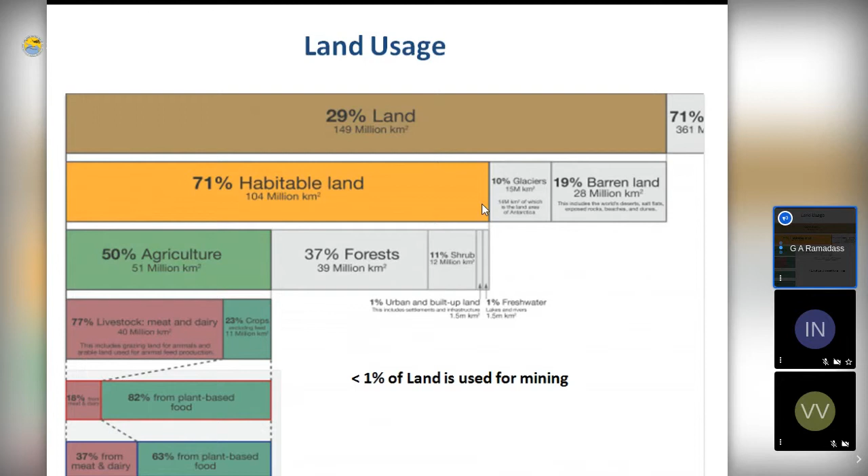Hardly 1% of the land is used for mining, and we have been using the minerals from this land. We have been using, misusing, and abusing these minerals for the last 5,000 years. Imagine if 1% can see us through for 5,000 years, then what can 70% give us? That is the importance of the deep ocean mining concept.

As you can see, many of the minerals will not last even for some decades, and some may last for some centuries. The great demand from developing countries for their just share and genuine needs is actually increasing the demand for these minerals.

Of course, we can alleviate these things by more exploration, better technology, and reclassification of resources to reserves. But there is a limit to what we can do about it. So ocean mining is imminent. It's not the question of if, but when and how.

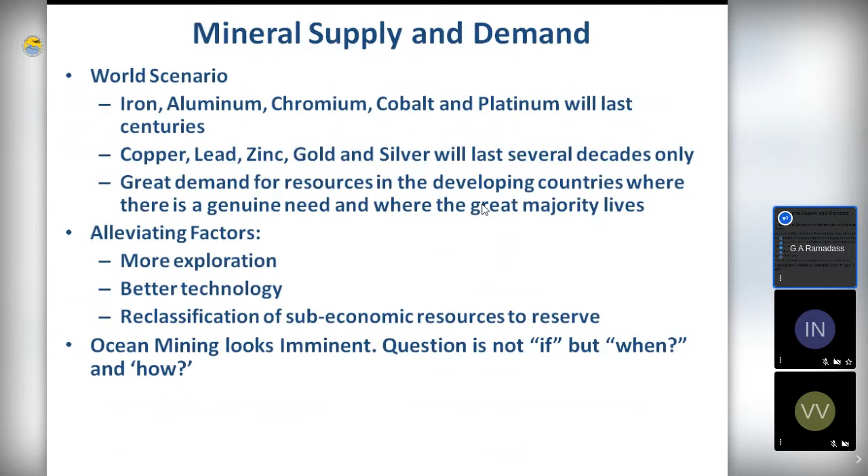So this is the history. In 1870 itself, there was speculation by Jules Verne, a famous science fiction writer, about the availability of these minerals at the sea bottom. But he said it is easier to exploit it. It's easier said than done, and we find it very difficult now.

As you can see in the right-hand corner, that's a painting of HMS Challenger. During 1872 to 76, they sampled some polymetallic nodules, which are like potatoes strewn on the seafloor, and they found that they are rich in iron, cobalt, nickel, and manganese. So we can say that is the beginning of the ocean mining efforts.

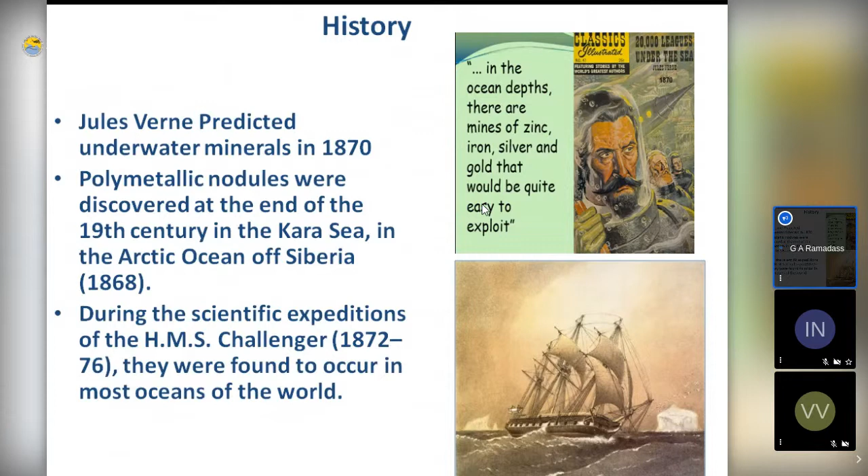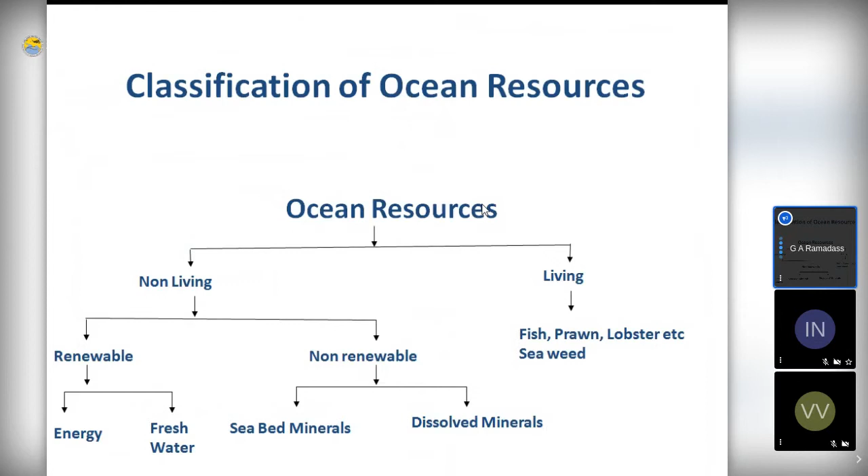There is no unique way of classification of these ocean resources, but I can say that they can be living or non-living resources. In the non-living category, today we are going to concentrate only on the seabed minerals, because there are some dissolved minerals like salts, uranium, and other metals.

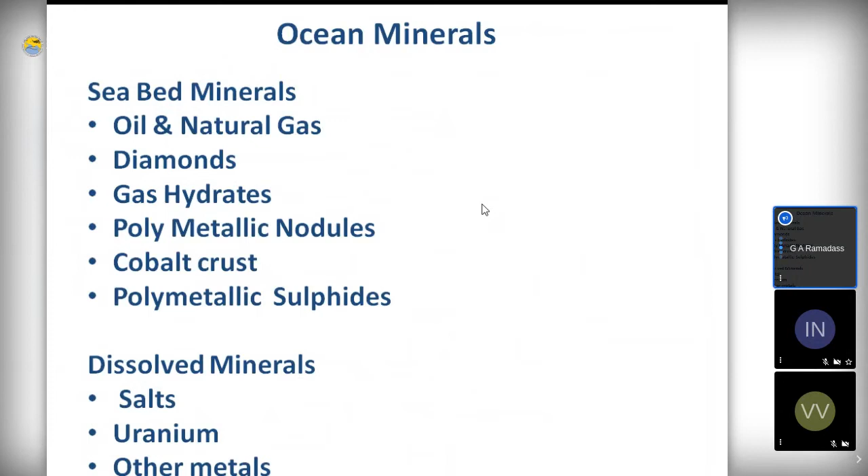Our concentration is on the seabed minerals like oil and natural gas, but I'm not going to talk much on them, and diamonds also I'm not going to talk. But gas hydrates, polymetallic nodules, cobalt crust, and polymetallic sulfides, these are of interest to the Ministry of Earth Sciences. So we will be concentrating on these four resources.

India has an exclusive economic zone which extends up to 200 nautical miles. The extended exclusive economic zone also extends even further. Whatever is available here is actually our resource, and we can use it without any express permission from any other organization. But beyond that, what is available is called high seas, and it is regulated by the United Nations, especially by the International Seabed Authority.

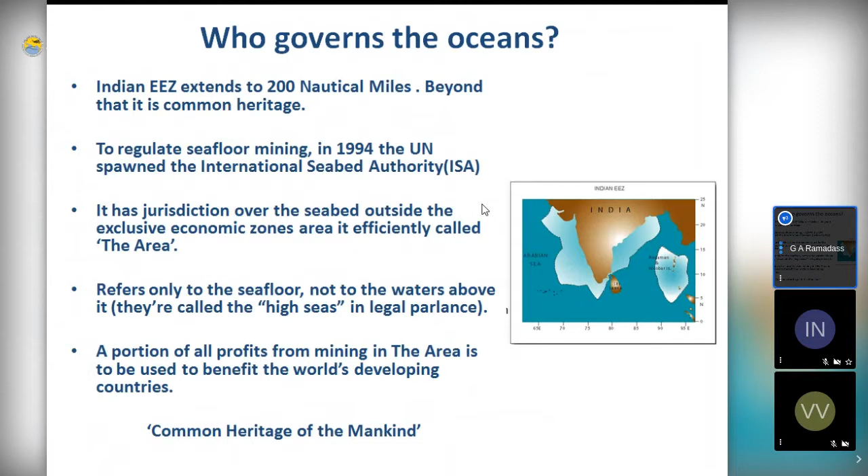It is an independent body, and they allot an area for the exploration and exploitation of minerals, and that area is called the Area. Beyond this, the rights are only given for the seafloor, but the waters above are called high seas, and we have no rights about that. A portion of the profits from this mining, whenever it comes, should be considered common heritage to mankind, and should be used for all mankind.

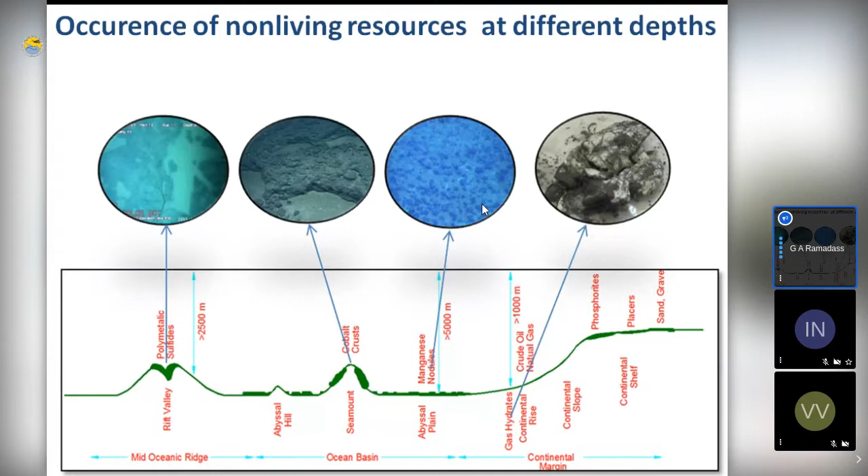So where do these minerals occur? Starting from the continental slope and continental rise, the first mineral that generally occurs is the gas hydrates. As the name suggests, it is a hydrate which contains gas. It is like camphor, it can be lighted and you can hold it also. A cage of water molecules hosts a gas molecule like methane or some other gas, mainly methane in our case. A cubic meter of gas hydrate can comprise 164 cubic meters of gas. It's like a small gas cylinder.

So the Ministry of Earth Sciences has an exclusive program on these gas hydrates, especially in the Krishna Godavari basin. We have concentrated our efforts there.

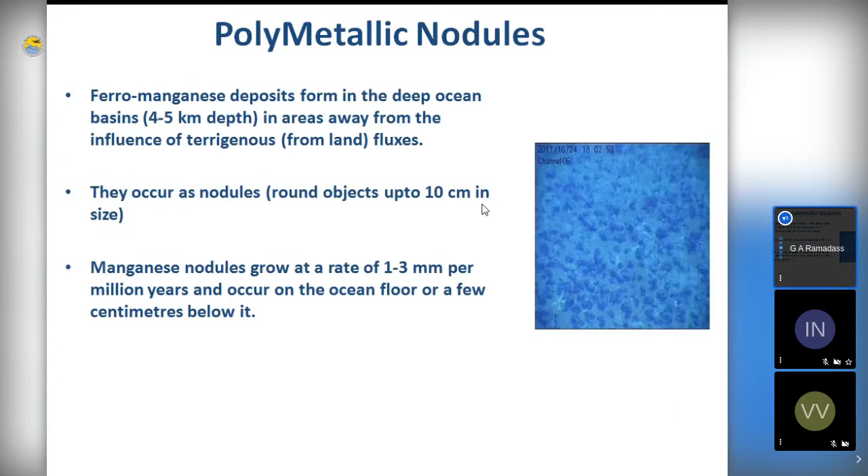The next one is polymetallic nodules. These are ferromanganese deposits. They actually look like potatoes, maximum size 10 centimeters. They are called two-dimensional minerals in the sense that they are available on the seafloor, and all we have to do is pick them up from that depth. But it's at 4,500 to 5,500 meters water depth, and these nodules grow very slowly, maybe 1 to 3 millimeters per million years, and that too when there is a nucleus like a shark tooth or some hard rock, layer by layer these things grow.

About India, India became a pioneer investor in 1987, even before the starting of this International Seabed Authority, along with a few more nations. An area of 1,50,000 square kilometers was given to India in the Indian Ocean, at almost 15 degrees south, 13 to 15 degrees south of India, from 2,400 kilometers away from the Indian coast.

A 15-year contract was signed with ISA in 2002, and it was extended up to 2022 in 2017. As you can see, the area is around 2,400 kilometers away from the Indian coast towards the south, and it has so many million metric tons of nodules which contain manganese, cobalt, nickel, and copper in the quantities mentioned on the right hand side. You can see the percentage - manganese is 27 to 30%, copper is 1 to 2%, and so on.

But it takes around 9 days for the ship to reach this place. As the old joke goes, by the time the ship reaches there and starts working, 50% of the team is seasick and the rest of the team is homesick.

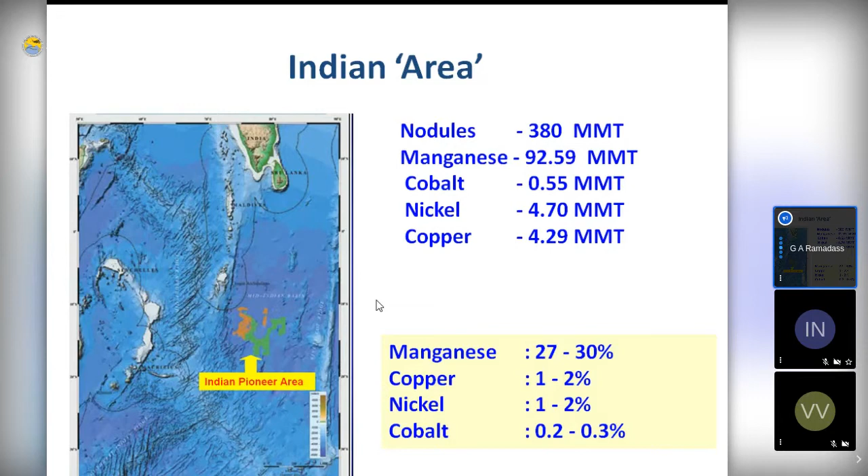So the next one is polymetallic sulfides. When the continental plates meet, when there are some gaps, the cold water tries to seep in and it meets the hot magma which is trying to come up. When they meet, a geyser-like system forms, and the steam that is generated gushes out. While coming out, it brings a lot of metals in the form of sulfides and sulfates, especially iron, copper, and zinc.

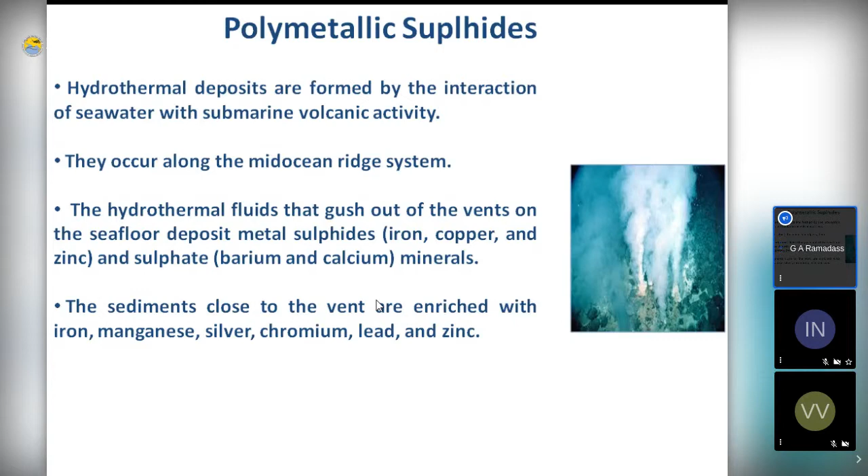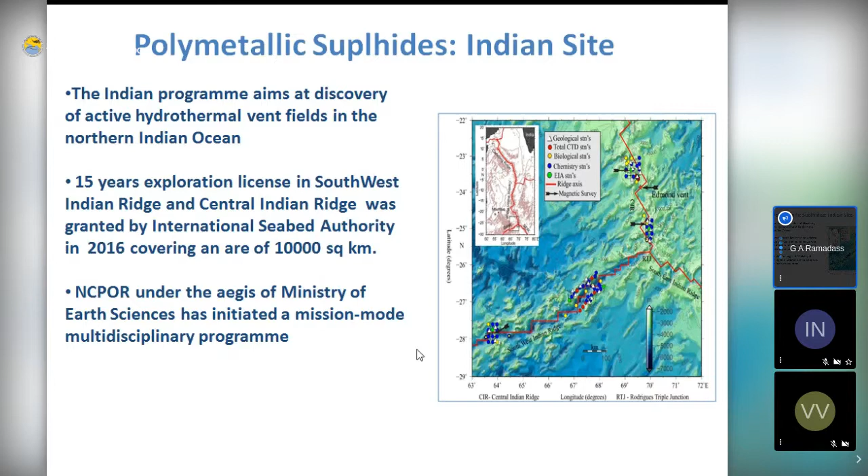Sediments close to the vent enrich the surrounding rocks - this is called mineralization, and these minerals can be harvested using the right technologies. India has signed an agreement with the International Seabed Authority for a 15-year exploration license in 2016, at around 25 to 26 degrees south, as shown in the picture. The National Center for Polar and Ocean Research, under the aegis of MoES, has started a mission mode multidisciplinary program and done a lot of survey and sampling work at this place.

Another important mineral is the cobalt crust. It's similar to nodules, but occurs as layers stuck to the ocean bed, so we have to scrape it off rather than collect it directly - it's not exactly a 2D mineral, so it needs hard scraping. It generally occurs on seamounts, and there are around 33,000 seamounts worldwide. In the map, the marked areas are the seamounts. India has not yet signed any contract with the ISA for exploration of cobalt crust.

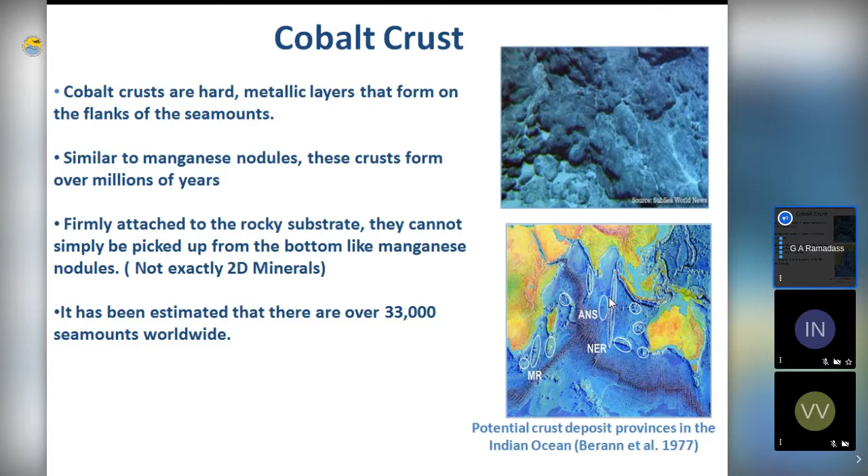So what are the challenges? Minerals are available, but it's not as easy as terrestrial mining, because the ocean - inner space, as we call it - is more difficult to conquer since it's a dynamic medium. The hydrostatic pressure at 6,000 meters is around 600 bar, so if you send a big vehicle there, it becomes a sort of pulp at that pressure. We need to develop appropriate pressure-resistant, pressure-compensated, and pressure-tolerant technologies for that.

Density and salinity variations also pose problems. Temperature is around 35 degrees on the surface and around 2 degrees centigrade at the bottom. Corrosion, especially galvanic corrosion of different metals, is a serious problem. Another serious issue is that electromagnetic radiation doesn't travel in water more than a few hundred meters, or even just tens of meters. So you can control a Mars rover sitting on Earth, but you cannot control a machine operating on the seabed from the ship without a cable, because electromagnetic radiation doesn't even travel beyond 100 meters.

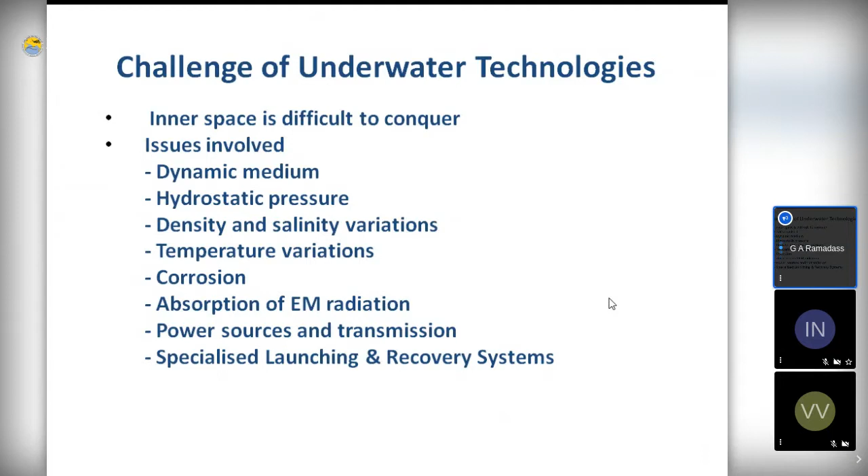Now we know we want to survey how these minerals occur and where they occur. So what do we do? There are different kinds of survey techniques available - seismic, acoustic, geophysical, and imaging techniques. This is a typical seismic survey.

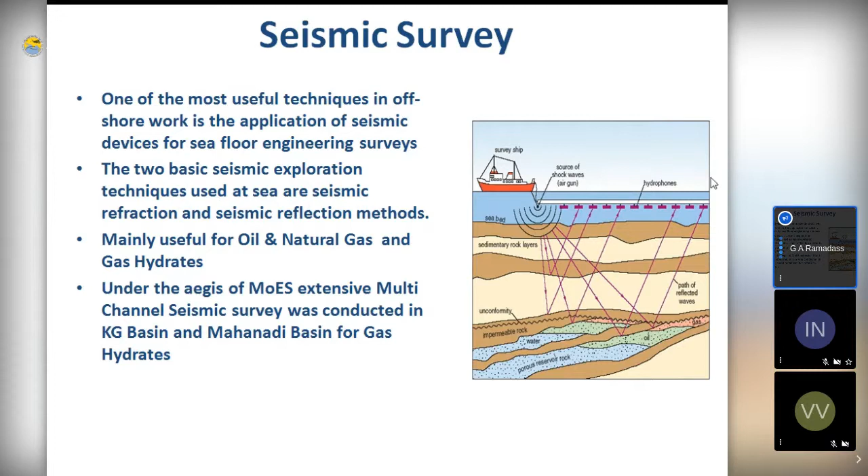As the name suggests, there is a source which generates shock waves in the ocean waters. These waves travel down and reflect and refract at different interfaces of the seabed, where there are sedimentary rock layers and impermeable rocks. By using hydrophones towed behind the mothership, we can receive these signals and analyze them to detect minerals, especially oil, natural gas, and gas hydrates. These seismic techniques aren't really useful for polymetallic sulfides or nodules, but they're an excellent technique for gas hydrates, oil, and natural gas.

Next comes acoustic survey systems, because we don't have the luxury of using electromagnetic radiation. If you want to see Saturn's rings or Jupiter's satellites, you can go to your terrace with a good telescope and see them. But to see what is below in the water, you have to take a ship to that area and launch equipment that can go to the bottom. In oceans, we actually use sound to see, so most of the equipment used there is acoustic based rather than electromagnetic based.

Even the location of an object placed on the seabed has to be found using acoustic techniques, similar to terrestrial GPS, because the GPS signal is not available at the sea bottom.

So we have to use acoustics. For the survey's sake, we use sonar systems. There are umpteen number of sonar systems, different types actually, but for our survey, we can say that we use 3 different kinds: echo sounder, side scan sonar, and sub-bottom profiler.

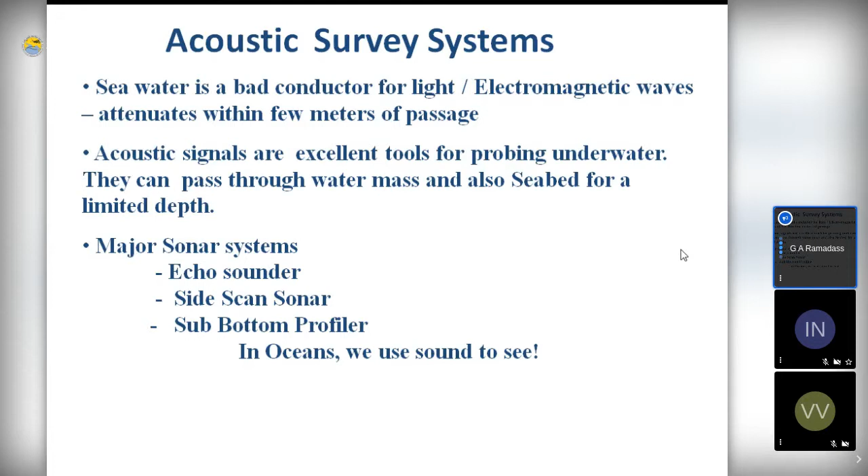A single beam echo sounder or sonar just sends a pulse below the ship. The sound pulse hits the bottom and comes back. We measure the time elapsed for the signal to go down and come back, and we know the velocity of sound in water, which is approximately 1500 meters per second. By multiplying the time and the velocity, we can get the distance. Half of that is the distance between the ship and the seabed, that is the depth.

As the name suggests, the single beam sonar sends only one pulse, so you get only 1 point below that. But covering a large area in the open ocean is difficult with the single beam sonar, so there is another way of doing it.

It's called multi-beam sonar. 240 beams are radiated into the water. They cover a large swath of area at the bottom, and when they come back, we can actually construct the bottom. You can see the difference in detail we get when we use multi-beam sonar versus a single beam sonar.

Next is side scan sonar, which is actually an imaging sonar - you can see what is there at the bottom. This kind of side scan sonar is used for finding 2-dimensional minerals lying on the bottom, and also for search and recovery, seeing shipwrecks or lost aircraft, and many other objects of interest on the seabed. There are also special kinds of sonars which work on backscattering.

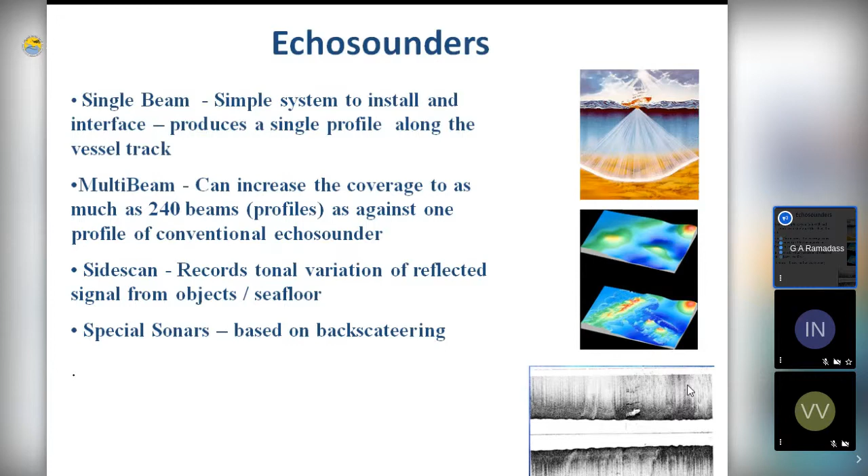So far we have learnt about survey techniques used from the surface. But for 6,000 meters, if you want to really penetrate, you have to use a very long wavelength sound. The problem is that you get very small, coarse resolution. Many details are lost when you survey from the top at 6,000 meters water depth.

So what we have to do is take this equipment close to the seabed. For that, we need some kind of underwater vehicles. The first one we generally use is called a DeepTow. As the name suggests, it is towed behind a ship, hydrodynamically designed so that at a given speed, it flies at a given depth below the sea surface.

A suite of sensors is fixed onto these things, and as we tow the tow body behind the ship, we can collect a lot of information, data, and even imagery. This can either be transmitted online to the ship or stored in the DeepTow itself. This is a typical DeepTow used by Scripps Institution of Oceanography.

For taking visual pictures, video, or still photographs at the bottom, the DeepTow has to fly very close to the sea bottom. But the sea bottom need not always be even, so especially in places with hydrothermal vents, it's very hazardous to fly these systems just above the seabed.

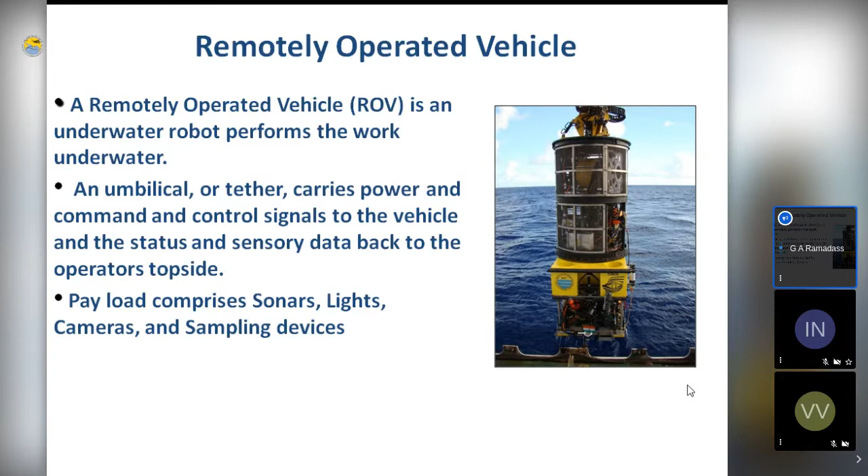Beyond a few hundred meters depth, it's pitch dark, so you have to carry your own lights for taking images of the bottom and the objects that lie there. These vehicles are also used for taking sampling devices to the bottom, and the ROV has an umbilical that connects it to the mother vessel. So you can see what it is doing.

You can intervene using robotic arms and do some kind of intervention, but the problem is that the distance it can move is limited by the length of the cable. If you use an autonomous vehicle, which doesn't have any connection with the mothership, this problem is not there.

You can have a wider reach, but because of the lack of communication between the autonomous vehicle and the mothership, you don't know what it is doing. It is completely pre-programmed. It can fly in a way you program it, and it collects all the data that is intended to be collected. You can see this data only after it is actually recovered.

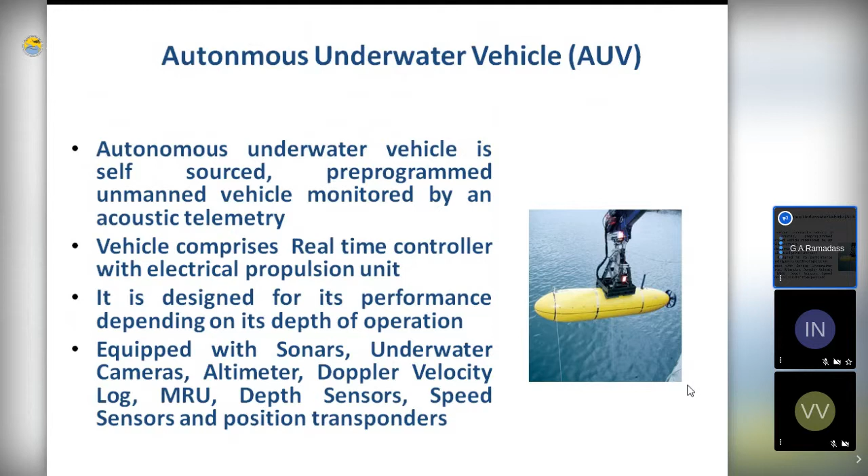Maybe you can get some rudimentary communication using acoustic data, but you cannot get any online control over this AUV from the mothership. So it is equipped with sonars, underwater cameras, altimeters, even magnetometers. Any sensor of interest can be interfaced with this AUV.

So now we have done the survey from the surface. Then we have gone into the water column, and just above the seabed, we have made the survey using DeepTows, ROVs, AUVs, and so on. Now we know what is there on the seabed. But how do you sample it? Unless you get to know what is lying there, what is the abundance, and what is the grade of the ore, whether it is worth really collecting this ore from the seabed, we need some kind of sampling.

So there are different kinds of sampling devices called grabs, dredges, and corers. These have been extensively used by the National Institute of Oceanography, Goa, and now by NCPOR, Goa. To give a feel of it, I'm mentioning only two grabs: one is the Van Veen grab and another is the boomerang grab.

As you can see from the picture, the Van Veen grab has a scissor-like contraption, with two arms with some buckets. When this grab hits the bottom and a rope is pulled, it closes, and while closing it actually traps some kind of nodules or minerals or sediments lying there. With the cable, you can pull it up and collect the nodules or samples at the surface.

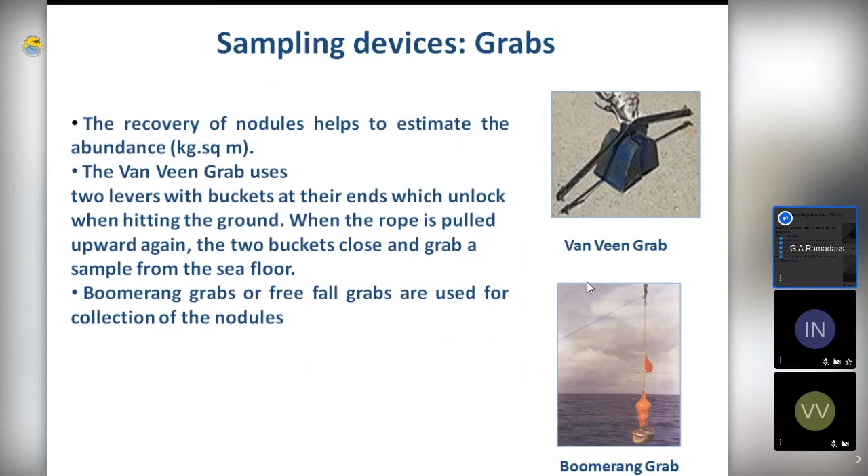So you can estimate, on average, how many kilograms of minerals are available per square meter. And you can analyze these minerals and say whether they are of good grade, whether it's worth really proceeding further.

There are some other sampling devices called dredges. These are launched with a rope from the ship. They have a net behind a metal ring, so it is weighted and literally dragged on the bottom. When it is dragged, these samples and minerals get collected there, so it can be brought back and you can have the samples for analysis on the ship.

Another one is the corer. When you launch these things with the weight, they go and penetrate the bottom, and some core is actually trapped in the barrel, and you can bring it up and analyze it. There are different kinds of corers, different variants, but I'm only showing two: one is a gravity corer, and another is a box corer. The box corer is pushed into the bottom by gravity force, and we often get undisturbed samples of the bottom using this box corer.

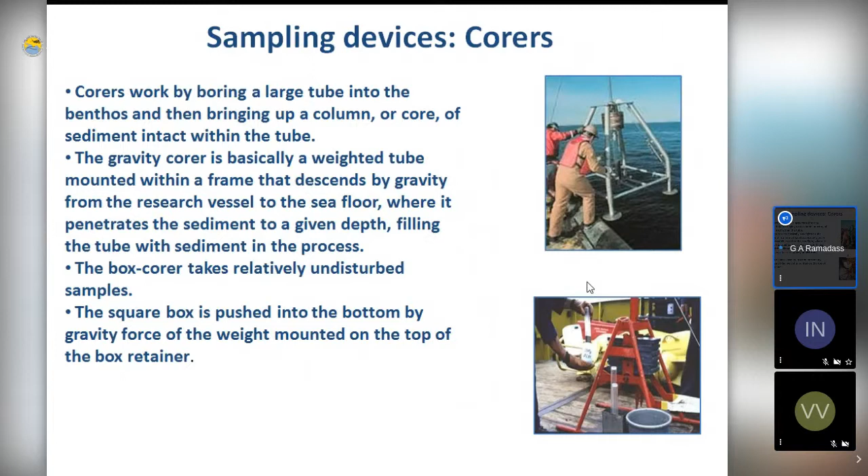So now, first we have surveyed, then we have gone into the water and had a close look, and we have even sampled these things, and then estimated the grade of the ore. But now we have decided to at least mine them, if not for commercial mining then by exploratory mining. Then we need some kind of underwater mining machines which can go and move on the sea bottom and collect the minerals available there.

There are different types of mining vehicles. Different countries have used different kinds of technologies.

These can be broadly classified into self-propelled systems and towed systems. As the name explains, a towed system doesn't have any self-propulsion; it has to be moved behind a ship. The problem is that the ship has to make movements to cover a large area, which is very expensive and time consuming, and it's not a very efficient system economically or technically. The other one is the self-propelled system.

These self-propelled systems move on the soft seabed. The seabed is so soft here at some places, especially at polymetallic nodule sites, that the bearing strength is hardly a few kilopascals and the shear strength is around maybe 2 kilopascals. So it is like grease. We have to size the machine and make its weight appropriate so that it doesn't sink by its own weight on the sea bottom.

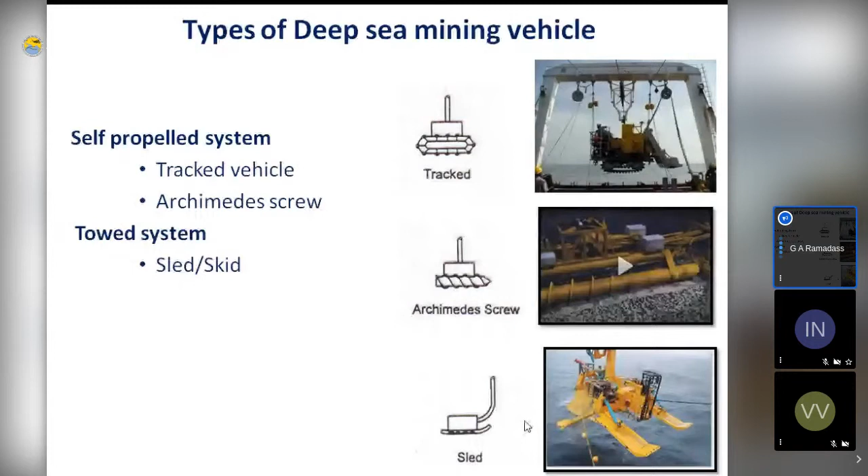You can see this Korean institute called KORDI used a self-propelled test miner. The sea trial was done in 2009 and 2013. The maximum depth they have gone to is 1300 meters.

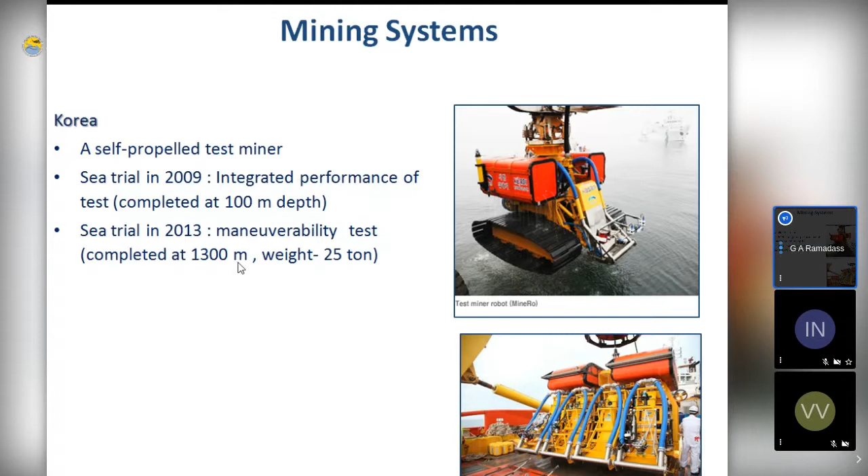The next one is China. China has gone for a tracked vehicle - you can see with a track belt it can propel forward. Whereas Japan has done some experiments with a towed miner system.

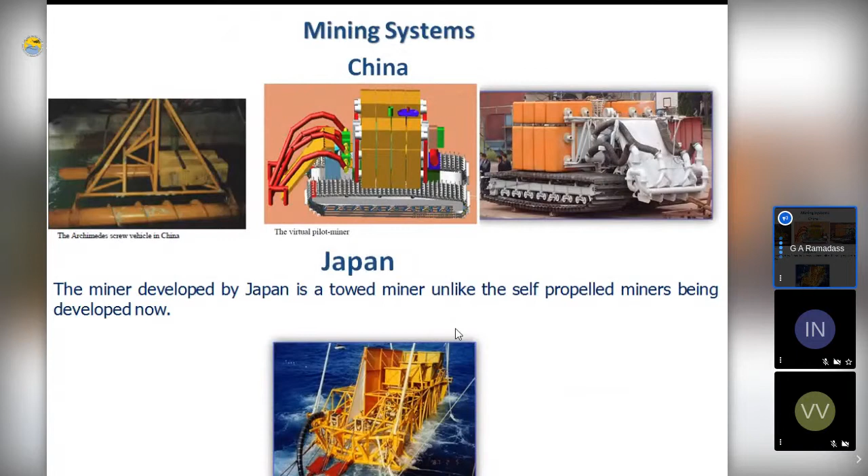So we have a mining system which can move on the sea bottom, but it has to collect the nodules or samples, especially for two-dimensional minerals like nodules. It is easy to collect these things, but we need some kind of collector systems with appropriate efficiencies.

These collector systems can be passive - a collection system attached to the mining machine. When the mining machine moves forward, it plows through the seabed and collects the samples, and the water is thrown out. But it's not a very efficient system because it actually slows down the collection.

There are some active collector mechanical mechanisms. You can see on the left-hand side a typical potato harvesting machine. There are two combs - one moves and another is fixed. The potato-like structures are picked up and conveyed using a conveyor belt to the mining machine. The advantage of this system is that the nodules are already washed, so we bring very little sediment when we use this kind of system.

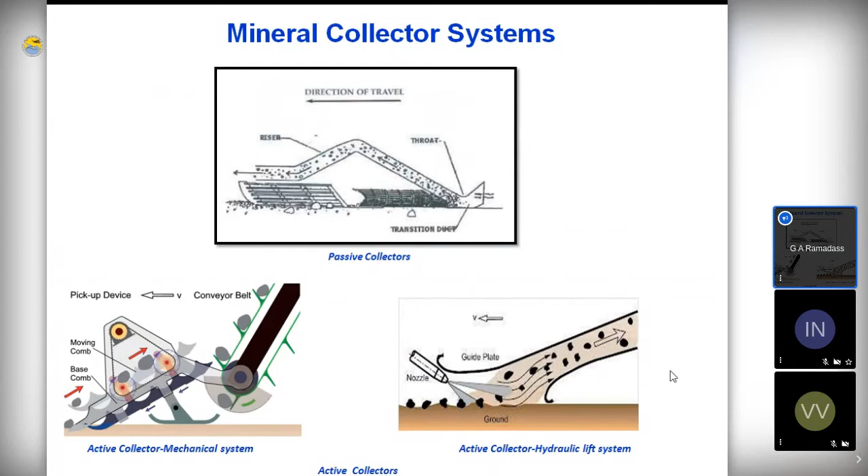So now we have collected the nodules. The mining machine collects them, but how do you send it up to the mothership, bring it up, remembering it is around 5,500 meters water depth? There are different kinds of techniques that were tried. Some of them may look trivial now, but when they started, they demonstrated these techniques.

The first one is called the continuous line bucket system. There are a number of buckets - for this we need 2 ships, so these buckets circle between the ships and the sea bottom. When they go down, they pick the nodules, come up, get emptied, and are sent back to the bottom. It looks mechanically simple, but it is very complicated in implementation.

At shallower depths, maybe this is a good idea, and it has been used. But for deeper depths, it is very difficult. In fact, when they tried it, these things got entangled, so this approach was later dropped.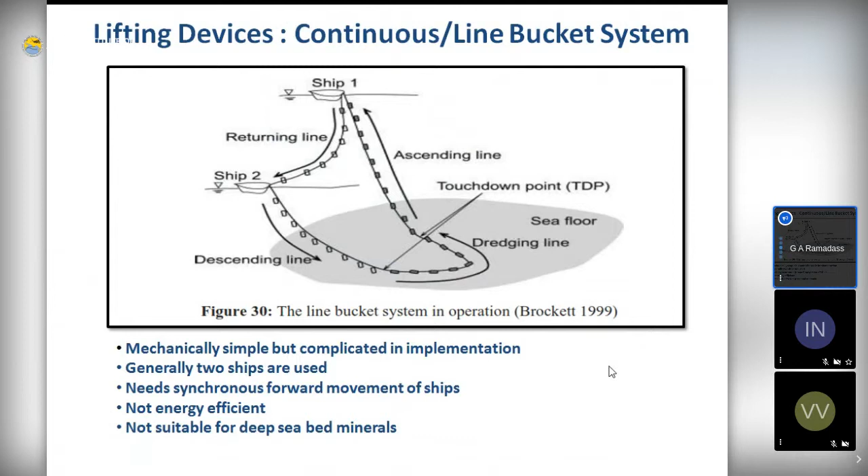Another very innovative idea is that you can send autonomous underwater shuttles, or drones. It can go down, collect these nodules from the mining machine, and drop some weight or pump out some water, become buoyant, and come up and deliver the ore to the surface. It is very energy inefficient, time taking, and technologically very complicated. The idea looks good, but the devil is in the details, and implementation is really difficult.

So it was tried and was actually dropped. But as the technology develops and matures, maybe we will have to revisit it at an appropriate time. The most widely used system is called Gemonod type system, also called the lifting method.

What we do is collect the samples or minerals at the bottom and send them to the mothership using a pipe, called a riser. This can be rigid, or flexible, or a combination of both. From the mothership, there is a riser coming down that is rigid, and later some part of it is flexible, connected to the mining machine. The nodules are collected here, and from here they are pumped to the top, to about 6,000 meters height.

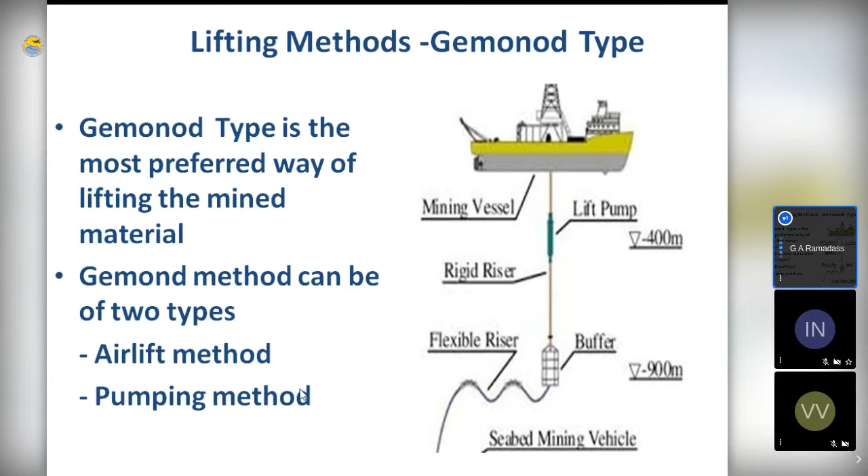So there are two kinds of methods: the airlift method and the pumping method. In the airlift method, as the name suggests, you have a high pressure air source on the ship, and this is pumped to the bottom of the riser system. When the nodules come here, these air bubbles make it less dense, and as the bubbles rise to the top, these nodules are transported to the top.

It is easy and doable for shallow depths, but for depths like 6,000 meters, it's a very low efficiency system, and over those depths we may need more openings at different places for pumping this air. So it's a slightly messy system, and it is not used in this form in underwater mining technology.

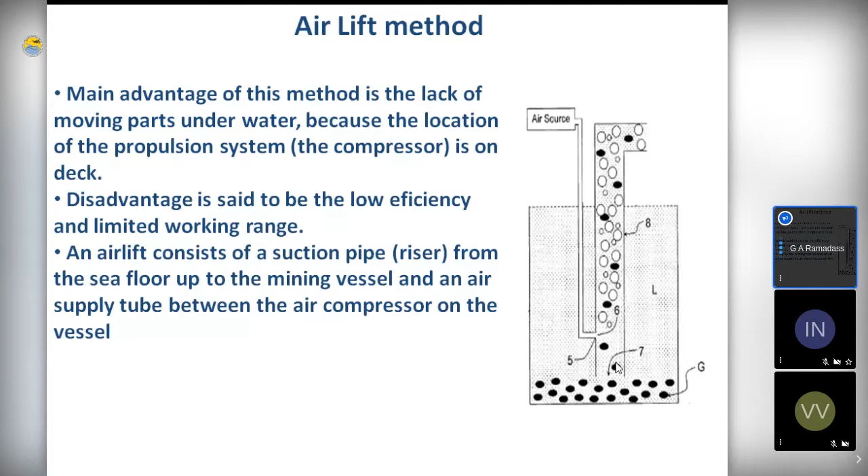The next one is the pumping system. Instead of having an air source at the top, there is a pump at the bottom or at intermediate places in the riser. With high pressure, the nodules mixed with seawater are pumped to the mothership. You can use centrifugal pumps or positive displacement pumps, both having their advantages and disadvantages.

If you want to use centrifugal pumps, they are used to obtain high flow with limited pressure head. So you need a number of these centrifugal pumps at different depths of this riser; we cannot use just one single pump. And we should have so many openings for power supply and control, making it a difficult system to implement.

But in the Glomar Explorer, which was a very successful demonstration, they used this kind of multi-stage pumping. Otherwise, you can use a positive displacement pump, fixed to the bottom of the riser, on the seabed itself.

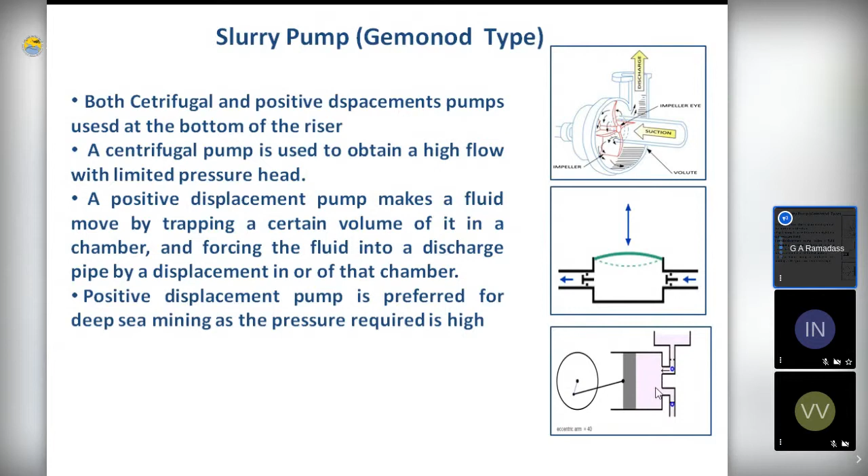These positive displacement pumps capture the fluid in their chamber, and using high pressure, push it into the riser. This is widely used, but our calculations show that for almost a 10% slurry, we need around 120 bar minimum pressure, based on the dimensions of the riser hose. And it's not easy to have this kind of pump at the bottom with a power supply.

So when we do all these things, we do create some kind of environmental issues. As you can see from this cartoon, the nodule miner collects the nodule, mixes it with seawater, and pumps it to the lift system or riser system. So some kind of plume is generated here, some kind of disturbance is generated.

In the absence of any currents, it takes years to settle down. And when it comes up, after taking the nodules, we leave out the wastewater and the tailings. But if it is left at the surface, it may create turbidity in the productivity zone, and it may affect the photosynthesis and productivity there. So it has to be discharged at an appropriate depth. So there is a compromise.

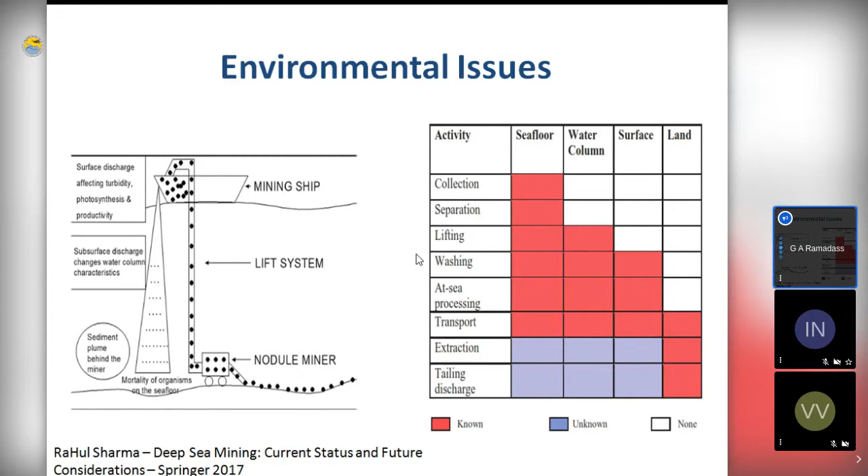This table shows that each component of the mining system, what sort of disturbance it generates and where it generates. So we have to make our system environmentally compliant or friendly.

Coming to the international scenario, there are different countries which are sponsoring states and contractors for the International Seabed Authority. There are multinationals and conglomerates working on this. Generally, Korea, China, Japan, Belgium, EU, and India are very active in technology development for PMN. Russia, Inter-Ocean Metals, Germany, and Japan are active in exploration also. The technology demonstration was carried out so far in USA, Japan, Belgium, and of course India.

The first and foremost experiment conducted for mining of the nodules is the Glomar Explorer. It was a covert operation for lifting a missing or sunken Soviet submarine, but the objective was given as mining of polymetallic nodules in the Pacific Ocean. But to their credit, it has been done. They used huge technology. Metaphorically, they used a cannon to kill the fly, but they demonstrated that it's doable, and that technically it's viable to pump these nodules from these depths.

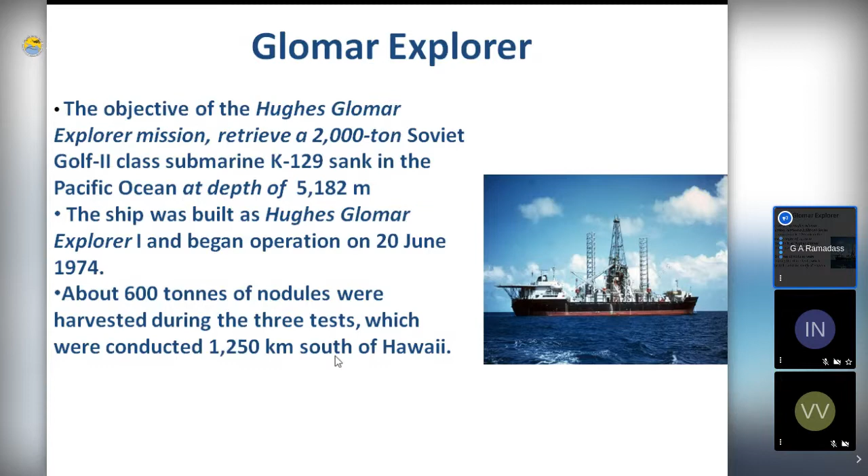It was demonstrated in the mid-70s. 600 tons of nodules were actually pumped from around 5,000 meters water depth, south of Hawaii. Korea has done a similar demonstration, as I mentioned earlier, at 1,300 meters water depth, using a propelled mining crawler.

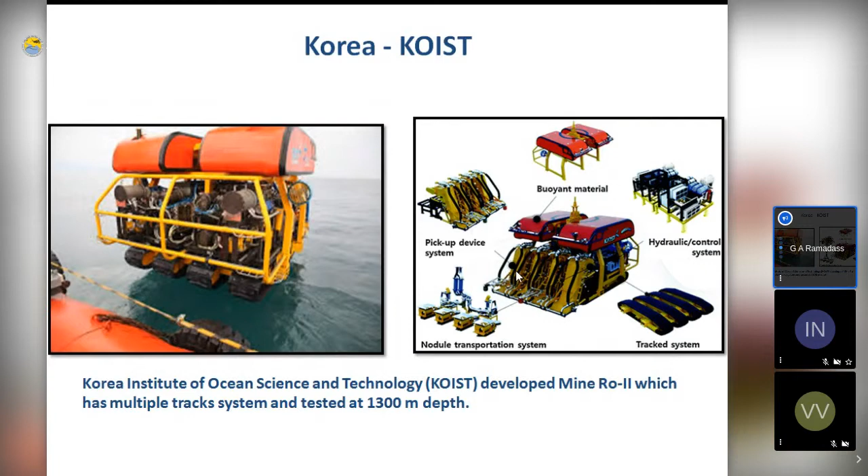Recently, Belgium has taken a lead. Global Sea Mineral Resources, GSR, signed a contract with ISA and made a bottom crawler called Patania 1 and Patania 2. They successfully demonstrated only the locomotion of this system at 4,500 meters water depth. They have not yet collected the nodules, or pumped the nodules to the surface. They are still in the process of collecting the nodules, going in steps. But it's a very promising effort.

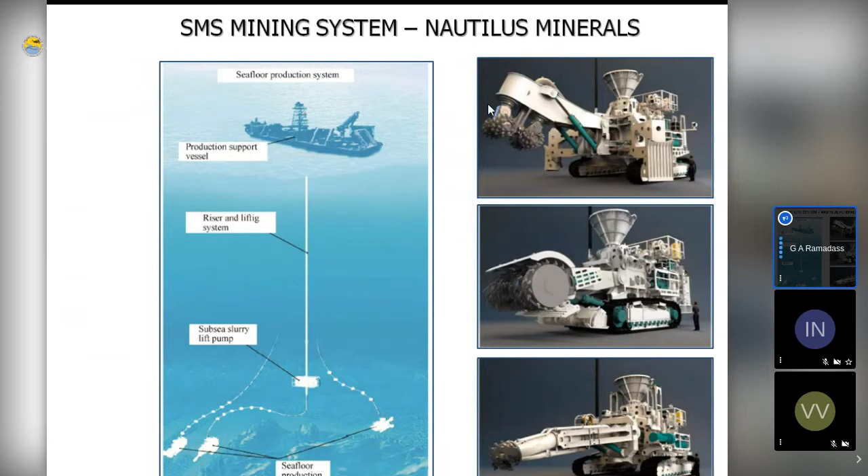Nautilus Minerals also made different kinds of systems. They had a contract with Cook Island, where nodules are available in their own EEZ. Later, because of some disputes, they could not go further.

The most successful and most recent story is the Japanese hydrothermal exploration. As you know, Japan is sitting on the ridge itself. So in 2017, they made a tracked vehicle with a cutter and cut these minerals at the bottom. If I remember correctly, it is 1,600 meters water depth, and they pumped it successfully to the mothership. The Japanese agency JOGMEC was very much successful in this one, and this gives a lot of hope for us to move forward.

Now, coming back to the Indian program, you can take it as a case study. This is the Indian Polymetallic Nodule program in a nutshell. It has 4 components: exploration, environmental impact analysis, mining technology development, and metallurgy development, that is extraction of these metals.

We are happy to inform you that when these nodules were dredged and brought back, copper was extracted from them, and sheets were made using this. There are many byproducts that came because of the extraction processes. These are the participating organizations apart from National Institute of Ocean Technology. NIO Goa did a lot of work in this; in fact, over the last 30 years they have contributed immensely to this program. And IMMT Bhubaneswar is participating in these efforts with their metallurgical processes.

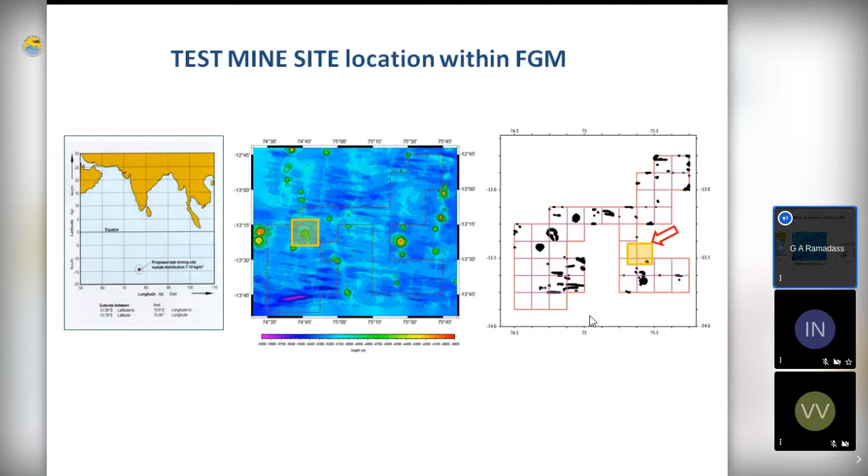The abundance was estimated. Average abundance is around 7 kg per meter square at this place. The best grade where it is available was also estimated. A first generation mining site and a test mine site was given to us, where we can conduct our mining tests in future. So the genesis is like this.

The preliminary conceptualization of this technology was done in the 1990s by different laboratories. But with the inception of NIOT in 1994 by then DOD, the responsibility was given to NIOT for developing mining technology for these deep ocean minerals.

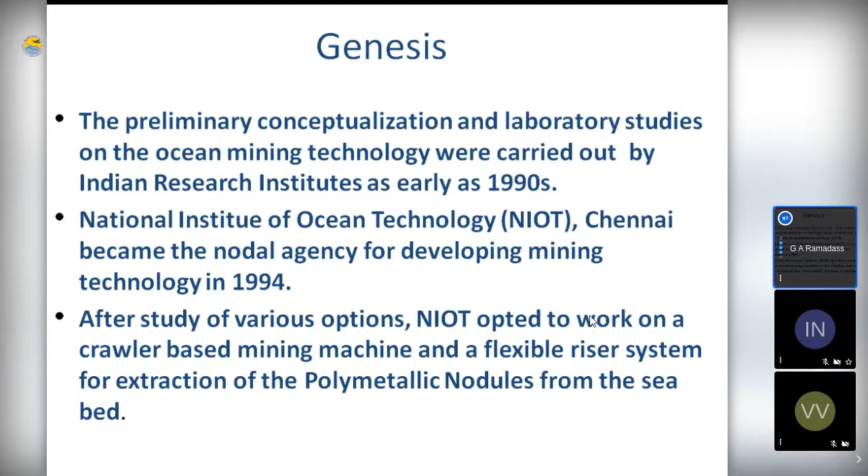NIOT opted to work on a technology which is crawler-based, self-propelled, tracked system, with a flexible riser system. This was a conscious decision because we used a flexible riser, which is not a rigid one. If we had insisted on the rigid riser, we would have required a ship with a moon pool, almost with the specifications of a drill ship.

So to demonstrate, our motto is to develop and demonstrate the technology, make the industries interested in this one, and then transfer the technology and hold their hand. With that idea, a flexible riser was actually proposed.

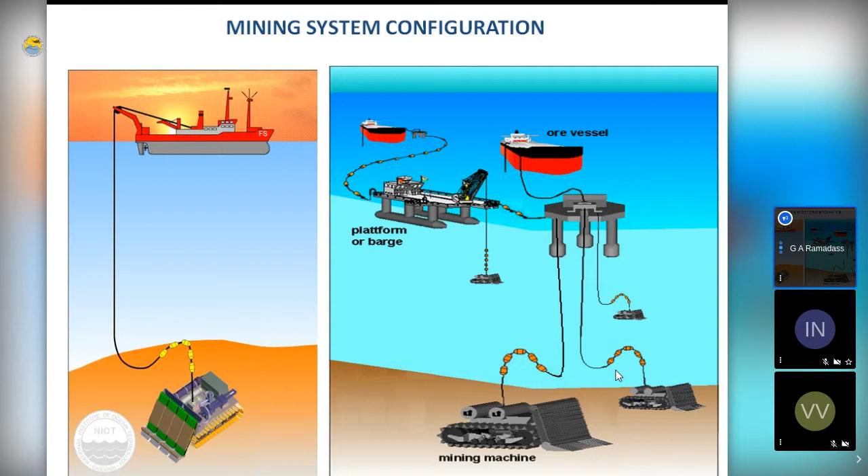Of course, one machine with one riser will not be economically viable, but when it is upscaled, number of mining machines can dwell on the sea bottom and collect the nodules. Then it will make the operation economically viable. So we are in the process of proving the technical viability before we go into the economical viability.

As I said earlier, multiple mining machines connected to a mother station can be used, and the advantages are that it is less cost intensive and it's actually modular. So if one system fails, another system will work. We also thought of ease of deployment and retrieval.

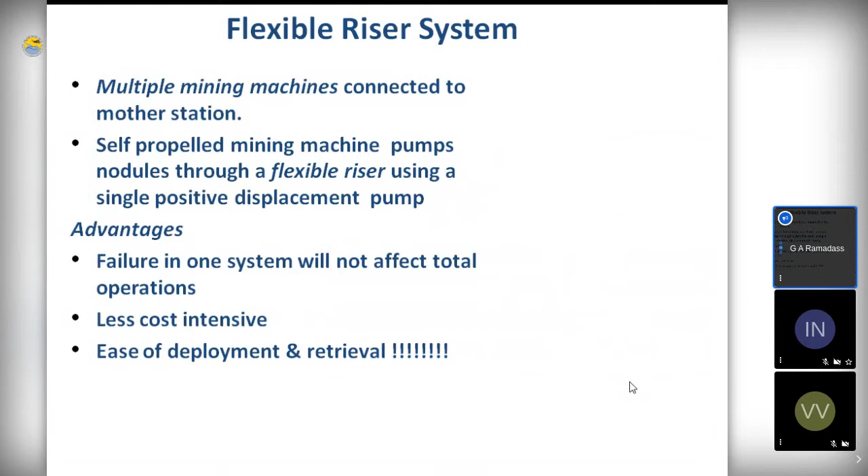It is easier said than done, because launching a 25-ton equipment in the high seas with a cable of around 40 to 45 millimeters diameter is not an easy task really. So when we started, NIOT was very new at the time, so we didn't have any wherewithal to do these experiments.

So we adopted a mining machine developed by University of Siegen, Germany. They had a sand mining machine, and it was adopted for underwater conditions. I can say that whatever ocean technology we learned in the civilian sector in this country has its origin in this crawler, which we call the underwater crawler—whether it is lights, cameras, navigation, or pressure cases, everything has come from this one.

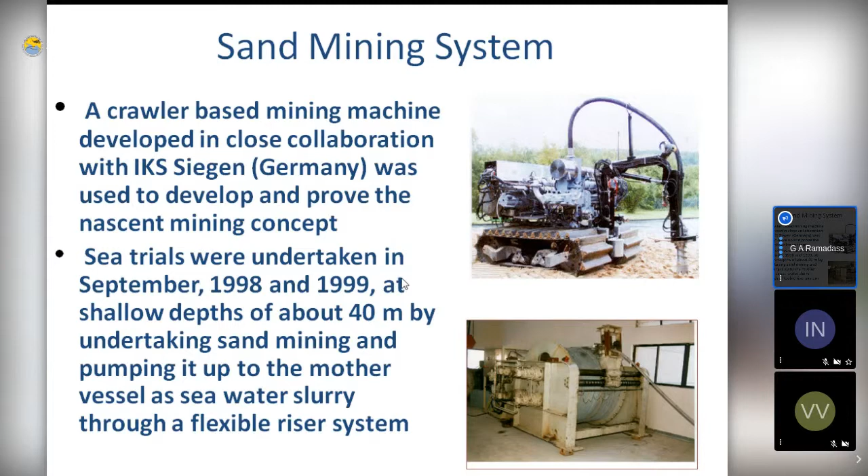Similarly, sea trials were taken in 1998 and 1999 on board Sagar Kanya for proving the efficacy. One young man, you can see, is sticking his neck out literally. He was a young scientist at the time, and he's going to retire this September. He is our director, Dr. Atmanand. So it shows how far this program has come.

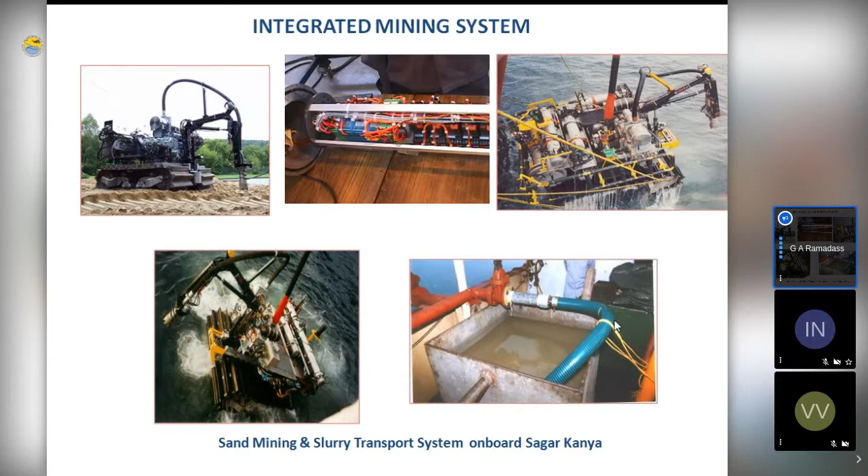Sand mining was demonstrated at 412 meters water depth on board Sagar Kanya on the west coast of India successfully. But by 2002, a 15 years contract was signed with the ISBA for eventually demonstrating the mining at the PMN site in the Indian Ocean.

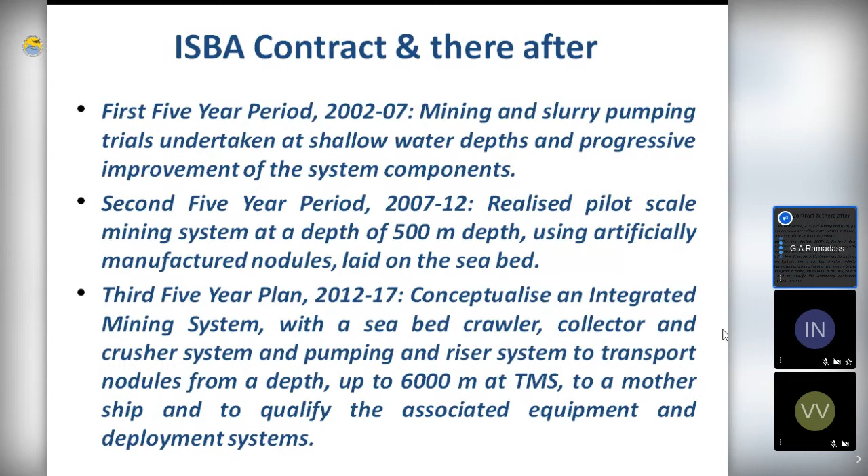So we adapted our technology for that one, and we converted the sand mining system into a nodule mining system by putting an appropriate nodule pickup system, which you can see here.

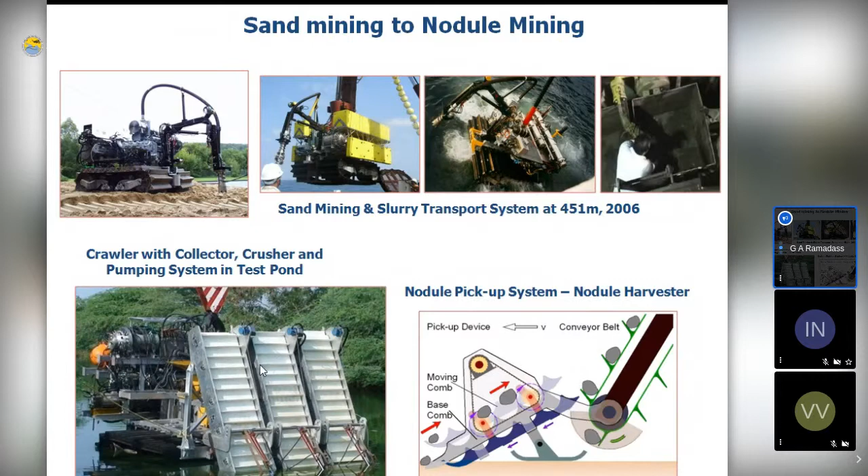But the problem is that our machine is actually capable of going to only 500 meters water depth, and there are no nodules at 500 meters water depth. So what we did is we prepared artificial nodules, which have properties similar to the real nodules, laid them on the sea bottom, and then sent our machine for harvesting them.

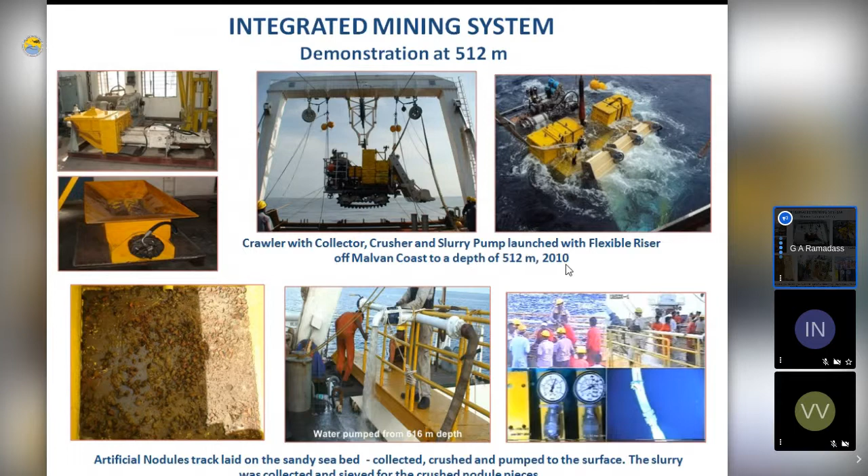This was successfully done in 2010 and 2011 at around 500 meters water depth, and this was actually a huge confidence booster for us. No other country has demonstrated an integrated system like this at these depths, except for Japan, of course, at 1600 meters water depth.

Now, after demonstrating at 500 meters water depth the capability of locomotion, nodule collection, and pumping to the surface, we want to graduate into 5000 meters water depth. But before we go there, we have to analyze the sea bottom—what is the strength of the bottom to withstand our mining machine, and whether we can get any locomotion on that one.

We used to collect seabed or soil samples and test them on the surface, but we could never get a true reading. So we wanted to make an in situ soil tester which can go down to that depth and do the soil testing there.

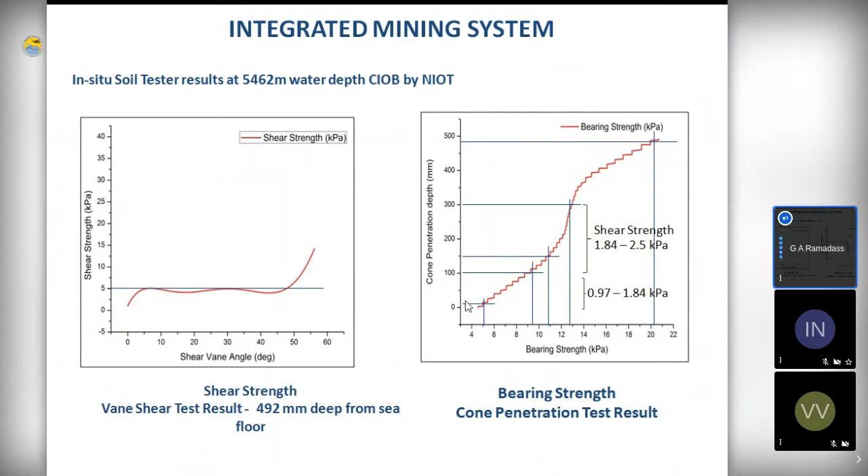We successfully measured the soil strength there, and as you can see from the graph, we got the shear strength and the bearing strength of the soil. Now we have enough data to size our machine and to design our machine, and to explore the water column from the surface to 5500 meters water depth.

It has been used around 45 times beyond 1000 meters water depth, and it was used twice at the polymetallic nodule site and once at the polymetallic sulfide site. But a lot of work is still to be done using this one.

It's a machine like a microscope. Once you see with a telescope what is there, you can send it, concentrate on a fixed area, and get a high resolution survey of the bottom. So this probably will be done in the year 2021.

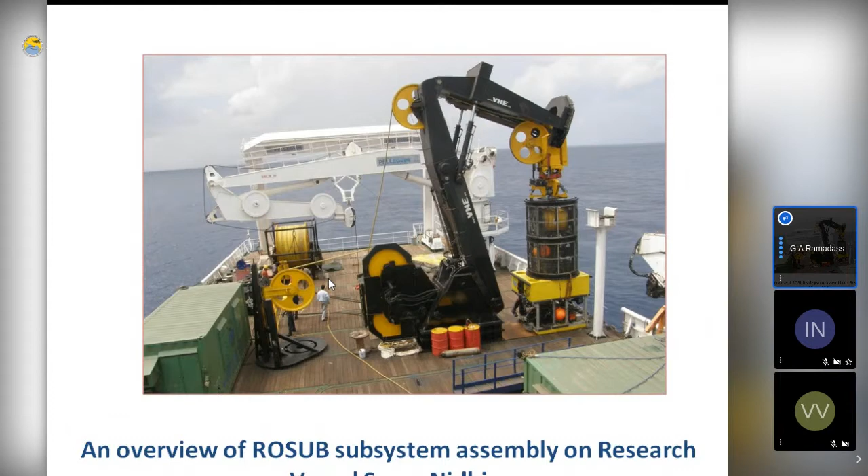We had a concept, and we started from the drawing board, and slowly we moved on to the actual fabrication of this machine.

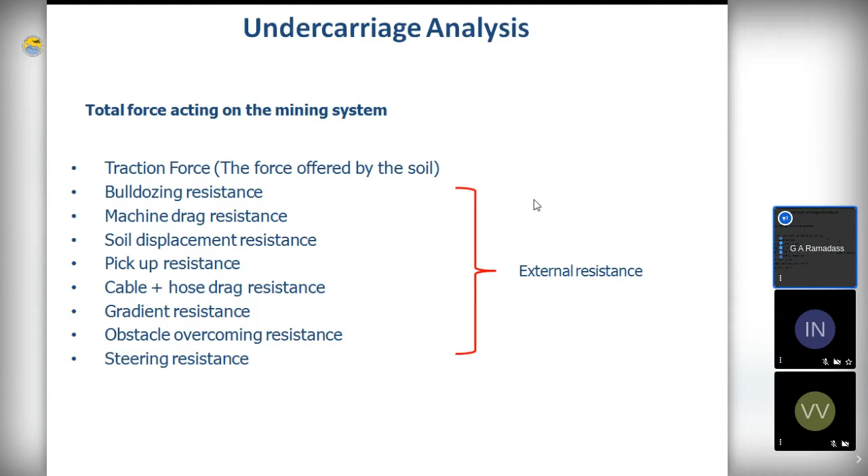This machine, when launched on the seabed, encounters a lot of forces like traction force, bulldozing resistance, soil displacement, water drag, and so on. So we have to give enough force to overcome all these things for this machine to move forward. We estimated all these things, and then we fixed the specifications of the system for development.

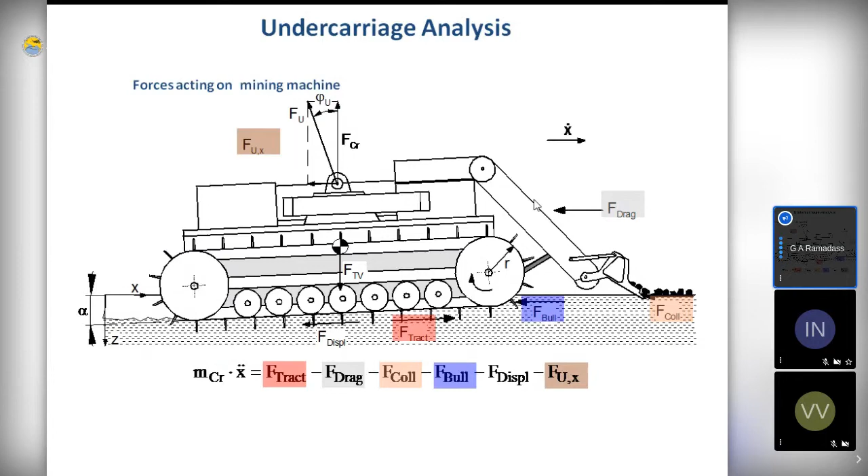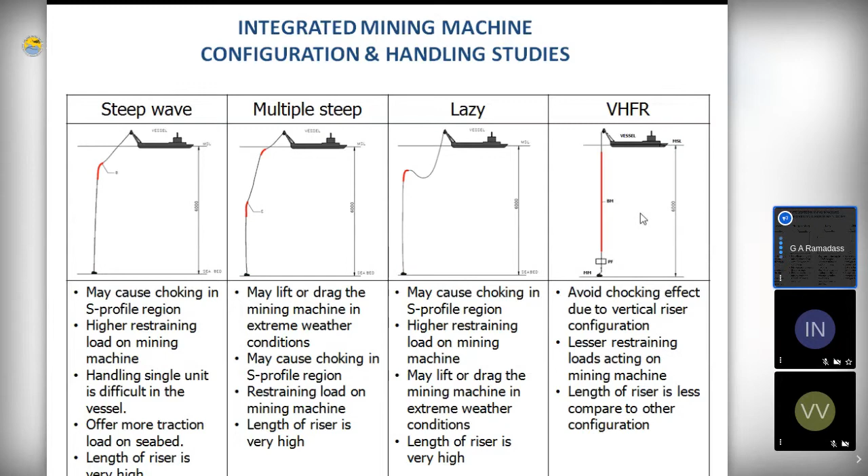So after developing the machine, how do we launch it? There are different ways of launching. Configuration and handling studies have been carried out, and after analyzing different kinds of configurations, we arrived at something called a VHFR system. This is how it looks like.

From the mothership, we lower it to around 5,500 meters. There is an intermediate pumping station hardly about 200 meters above the seafloor. This mining machine moves, collects the nodules, crushes them, mixes them with seawater, and using a centrifugal pump, pumps it to the pumping station 200 meters above the seabed. From there to 6,000 meters up to the mothership, it is pumped using a positive displacement pump.

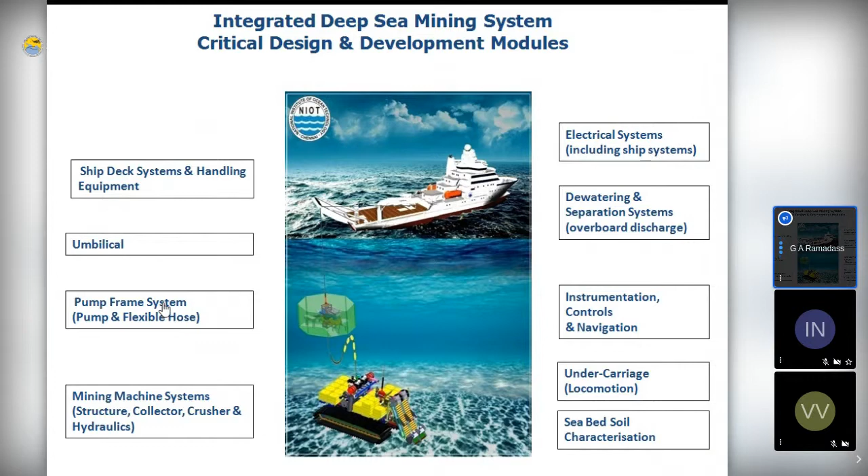So we have divided the critical systems into ship-based systems, water column systems, and sea bottom systems like this. I cannot talk about all the systems due to paucity of time.

We can see that the vertical riser, a hose, is actually tested. It needs to have the capacity to withstand around 120 bar internal pressure, so we tested that. The pump system is separately tested. The traction and locomotion are separately tested in a bentonite tank, which has properties similar to the seabed.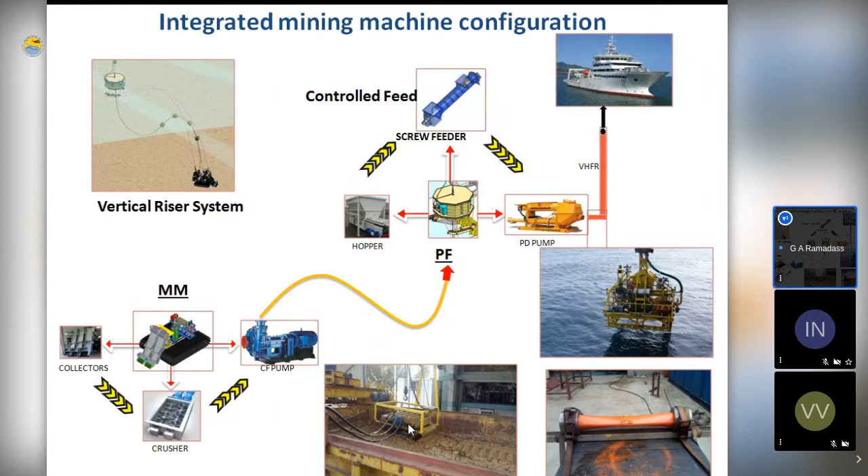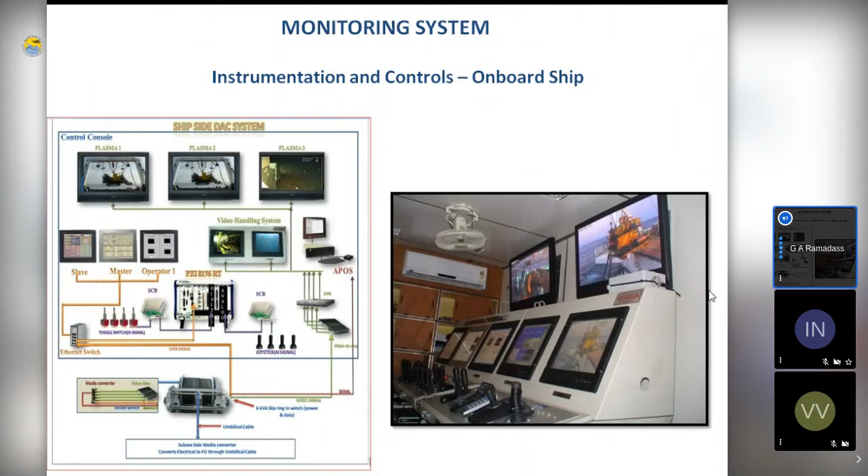With all these things, we have assembled and fabricated our crawler. Now this has to be lowered from the top and controlled from the top—you have to give power, control signals, get the data, and drive it on the sea bottom. For that, we made electronics and a containerized control room where we sit and control this mining machine, and also determine what sort of power is required for operating this pump and the mining machine.

Our estimate clearly shows that we need around 550 kilowatts of power, which has to be supplied through an umbilical cable, which has fiber optic fibers going through it, conductors going through it, and Kevlar for giving strength to the rope. We are in the process of identifying this umbilical cable and a specialized launching and recovery system for this.

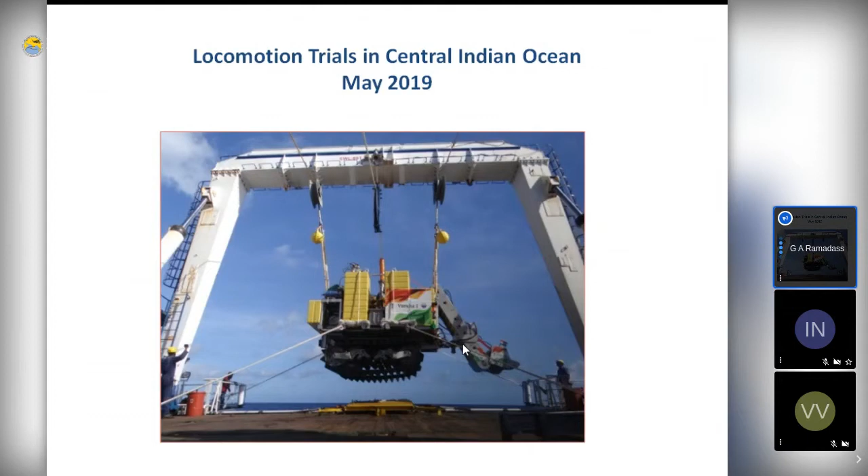This is how it looks when assembled. As you can see, in May 2019 we tried this locomotion. We are going in steps. First, at 65 meters and 890 meters, this machine was tested, and you can see how it was launched and the underwater pictures, the track marks, and how the soil was disturbed by this mining machine. It was successful at 890 meters.

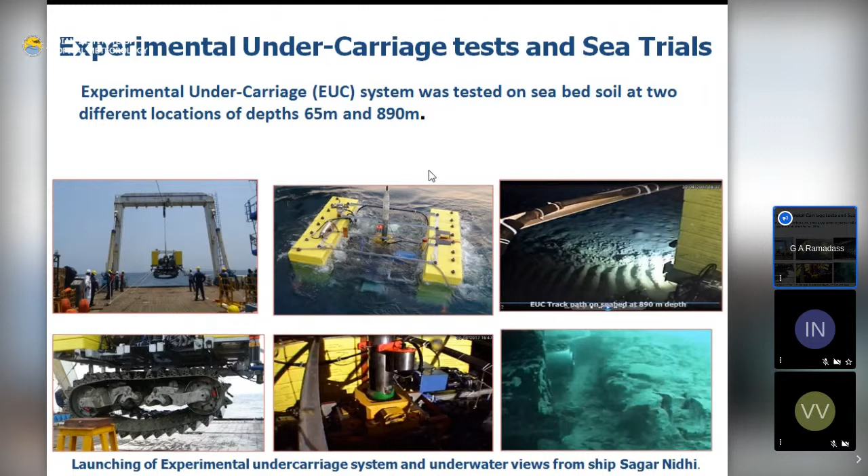The next phase was done very recently, in February 2020, at 3,420 meters, this mining machine was tested. It weighs around 15 tons in air and maybe 5 to 8 tons in water. This is how it is launched from the ship, and before launching, you can see how it looks.

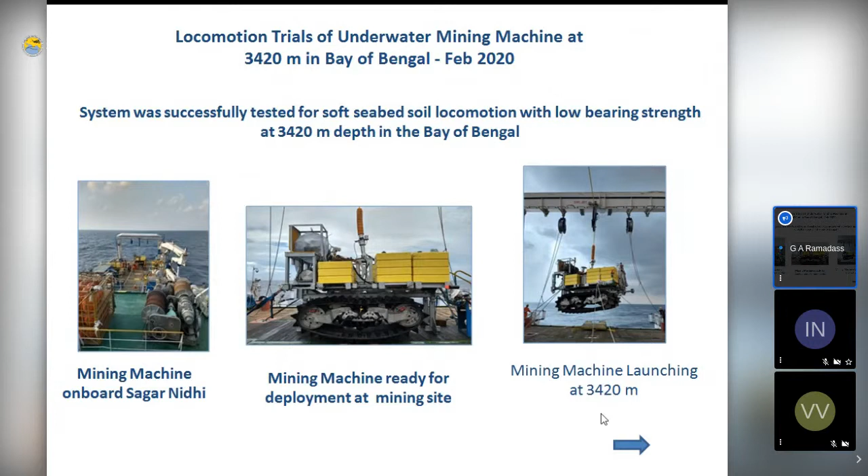There is a short video of our work. Maybe at the end of the talk, I'll be able to play a 2-minute video for you.

I have not talked much about the environmental impact or the metallurgical processes because I am sticking to technology development alone. But before we demonstrate our test mining system at CIOB, the Central Indian Ocean Basin, we need to collect environmental data before, during, and after the mining machine trials. So we are working closely with the National Institute of Oceanography for collecting and analyzing this data.

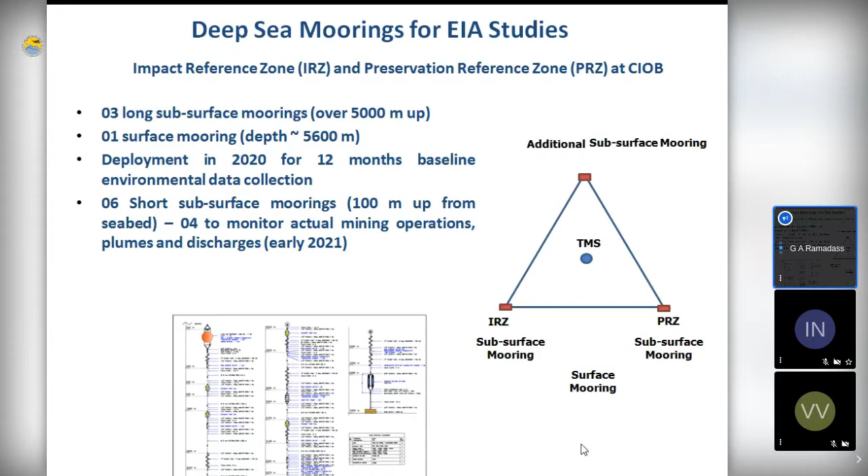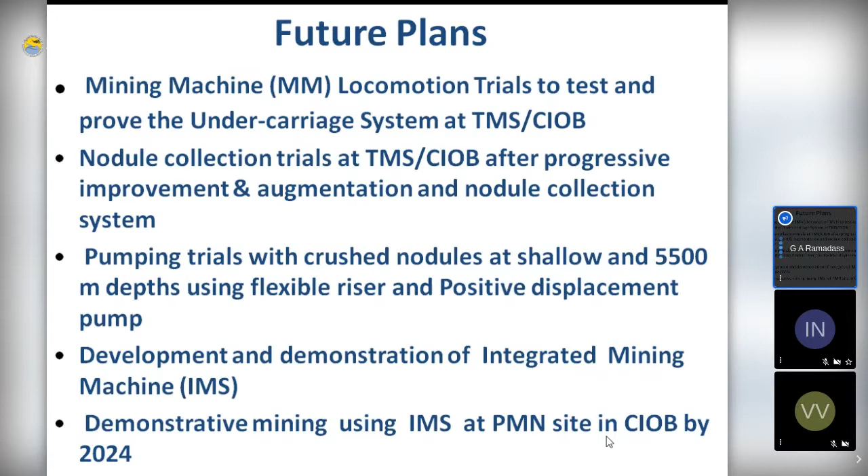These are our future plans. We have divided our work into small steps. The first is to demonstrate locomotion at 5,500 meters water depth. Second is nodule collection capability and efficiency estimation. Third is to separately pump these nodules, already extracted and maybe taken in a basket to the depth, and demonstrate the pumping capacity. Finally, integrate all these systems and demonstrate an end-to-end system at 5,500 meters water depth. We are hopeful that we'll be doing it in 2024.

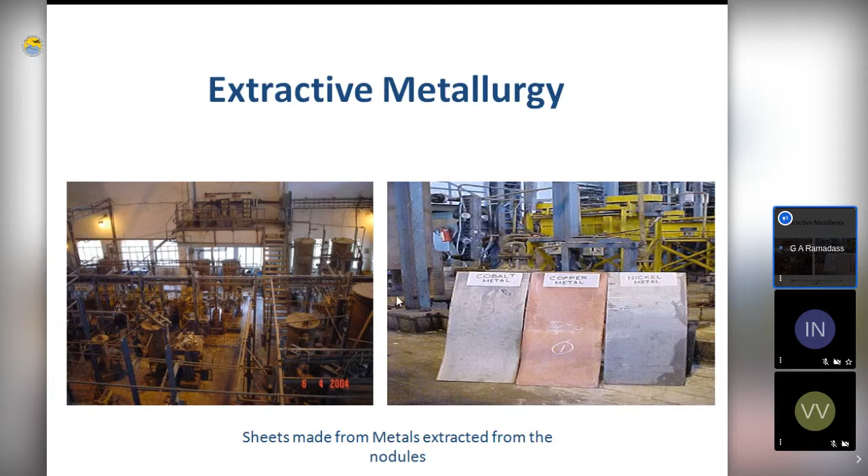I didn't talk much about metallurgy. You can see the sheets made of cobalt, copper, and nickel extracted from these dredged nodules. They have not been brought by the mining machine, but were dredged using some kind of dredging techniques. IMMT is actively working on this.

These vehicles are the offshoots, or spin-offs, of this program. We made a mining system which can go to 6,000 meters. We need a deep water ROV, so we made one that can go to 6,000 meters. There is a soil tester which can go to 6,000 meters and test soil strength in situ. There's also a drill that can be used for gas hydrate exploration, though I won't go into that now. And there is a shallow polar ROV which can work at 500 meters water depth in polar conditions, and it has been demonstrated at Antarctica. These are the spin-offs of the Indian deep sea mining technology development program.

The next step addresses limitations of unmanned vehicles. An ROV has limited range, and an AUV has no control. If you combine the capabilities of these two, that is a manned submersible: three scientists can go to 6,000 meters water depth in a small submersible with an endurance of around 12 to 16 hours, and emergency endurance of a further 96 hours. So we started this project.

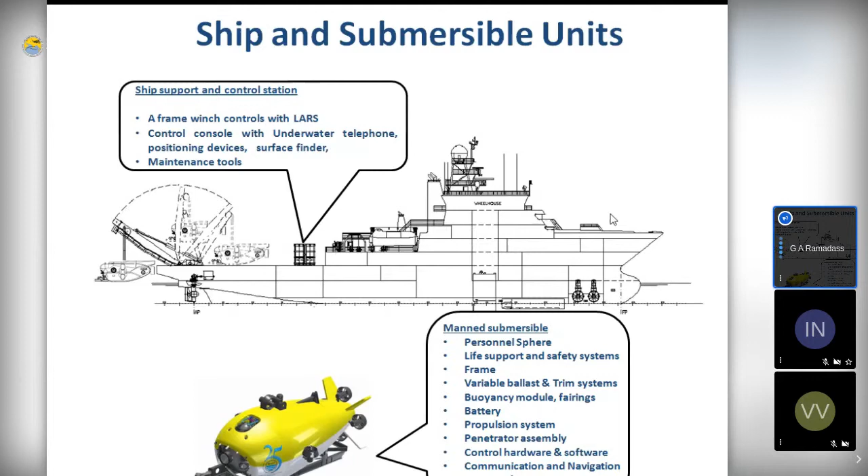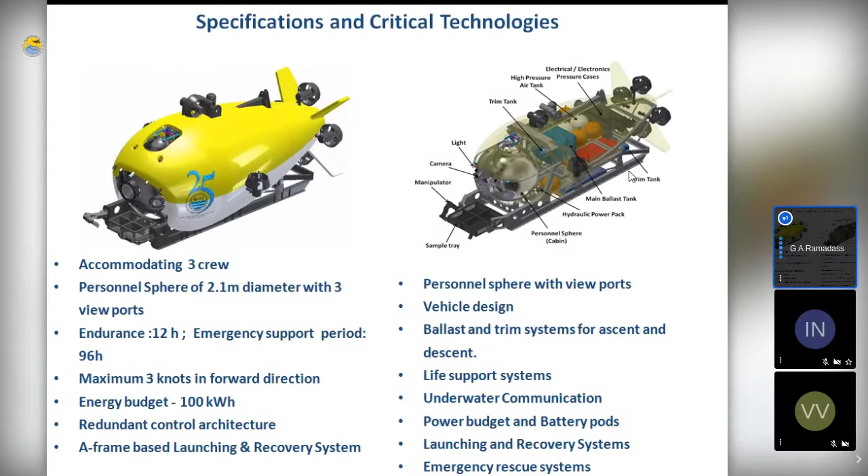It's called the Manned Ocean Mission. We have identified the critical technologies involved, and with the help of Indian industry, ISRO of India, and some international collaborations, we are in the process of developing these components. By probably 2024, this Indian manned ocean mission, Samudrayaan, with the Matsya 6000 vehicle, will be able to demonstrate its capabilities.

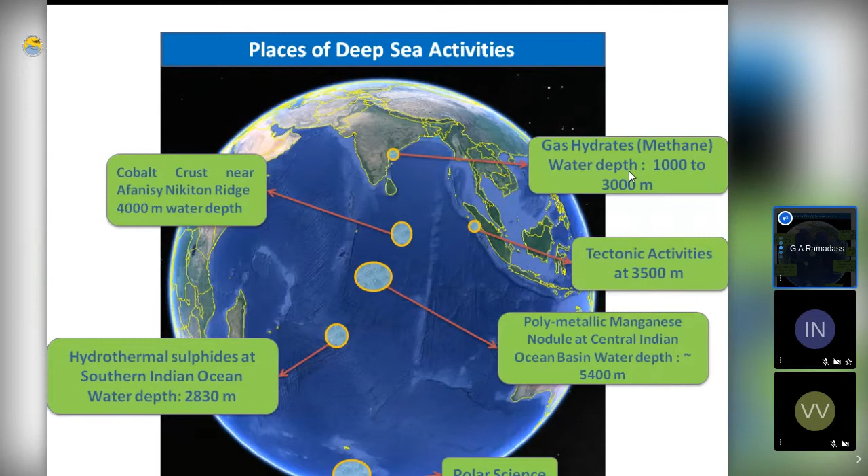These are the places we have already visited, shown on the globe, and these are the places of interest for us for minerals and geological purposes. We have been working in these areas and would like to work more in them.

I would like to summarize my talk, as I think we are approaching the time. There is no doubt ocean is a treasure trove of strategic minerals, and as the depletion of terrestrial mineral resources is a fact, we cannot ignore the ocean mining option.

Technology is maturing, and several nations and conglomerates are developing these technologies, including India. There was a misconception, and actually still is, that India is not in the forefront. But through this webinar, let me assure you that India is very much in the forefront. In fact, ISBA is looking forward for India to demonstrate this technology at 5,500 meters water depth.

Whatever technology we develop, it should be economically and environmentally viable. At this juncture, our motto is to develop and demonstrate. I think we have done and we have been doing it. Now it is high time that industry is sensitized about the need of this technology, and we have to make them participate in this venture.

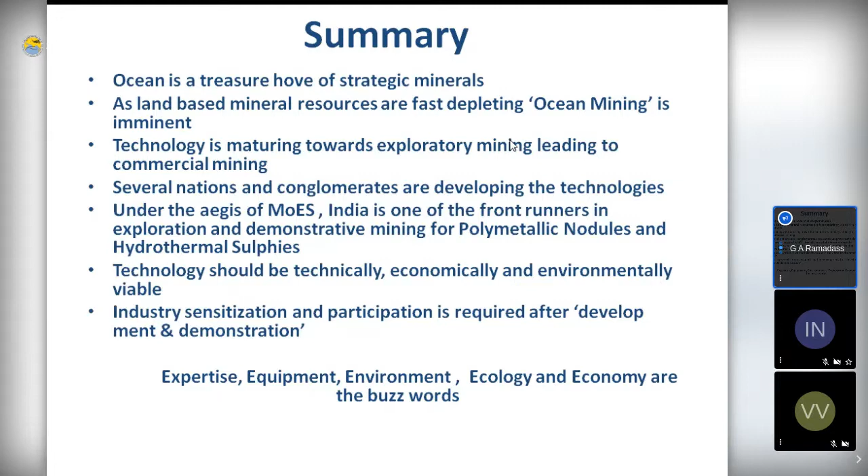So there are many E's involved: expertise, equipment, environment, ecology, and economy. These are the buzzwords we cannot forget.

I would like to conclude my talk saying that there is something called Gartner's hype cycle. When an idea is generated, it gets a lot of hype, and media also joins in. So it's at the peak, but after some time the negative press starts. There is a peak of inflated expectations, a trough of disillusionment, and later the technology matures and slowly it goes up. In my view, we are at the phase of slope of enlightenment, and success is only around the corner.

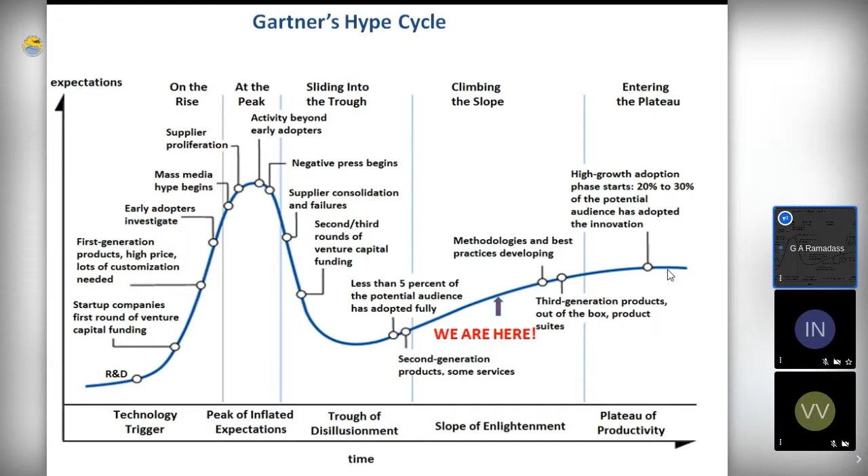Very soon there will be a mature technology for safe harvesting of ocean minerals from the ocean depths.

I could not cover a lot of topics because of the paucity of time and my own limitations. But there is a wonderful book compiled by Dr. Rahul Sharma of NIO, ex-NIO Goa scientist, and who's who of the Indian mining program, renowned stalwarts like Dr. Sudhakar, Dr. Baban, Dr. Nagendranath, Dr. Das, Dr. T.R.P. Singh, Dr. Atmanand, and yours sincerely, and so many people. I might miss some names. They have all contributed to this book, and it makes wonderful reading.

In its time, it was one of the most downloaded books, if I am right. You can get it from the internet, and it makes a good reference book for people who want to work in this mining technology development.

It is clearly said that the impossible is indeed possible when talented engineers with the courage to take prudent risks are provided an incentive to stretch the state of the art. This is actually a statement from the Hughes Glomar Explorer expedition.